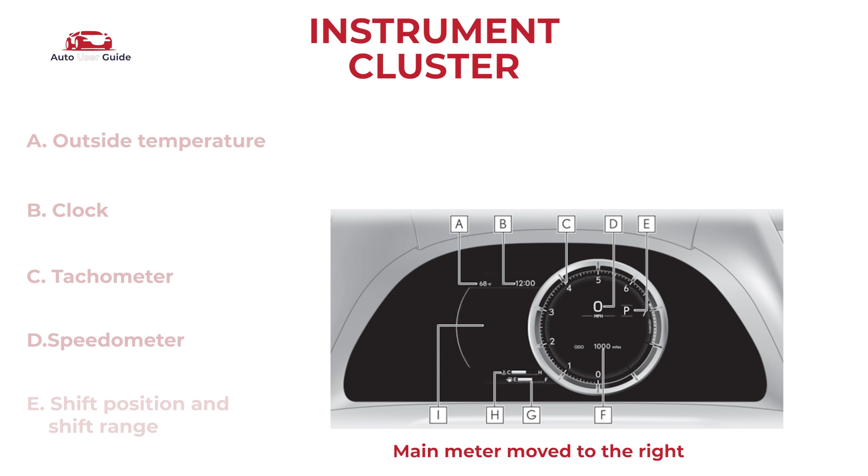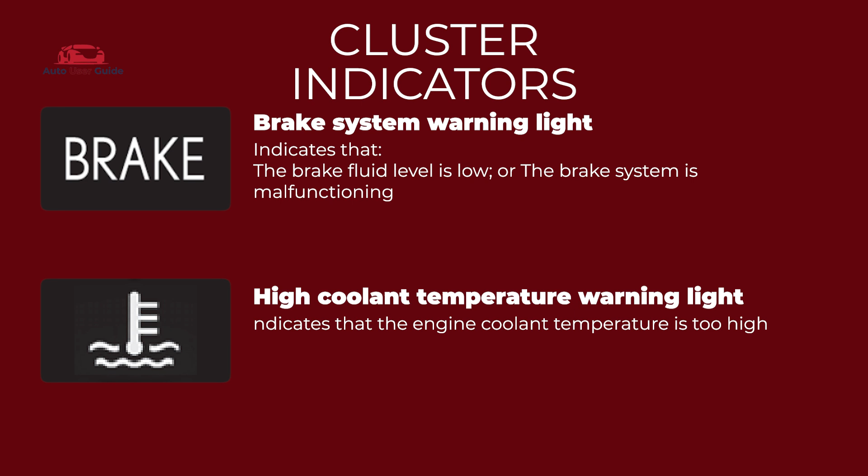Cluster indicators: brake system warning light, high coolant temperature warning light, charging system warning light, low engine oil pressure warning light, malfunction indicator lamp, and SRS warning light.

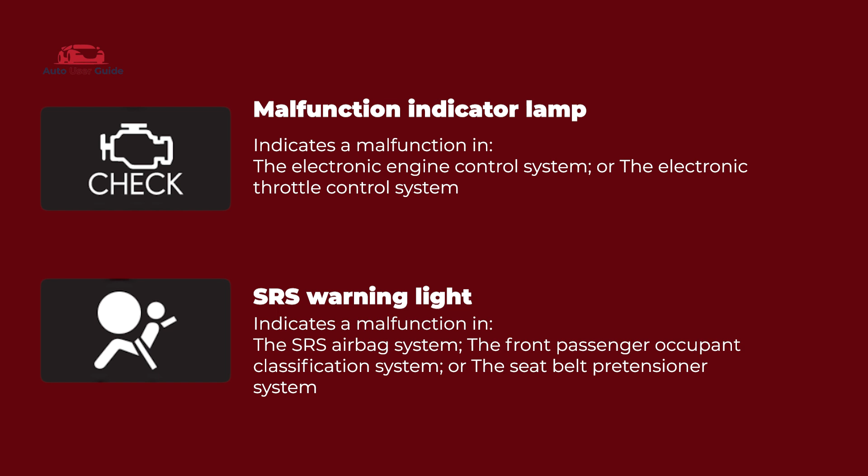ABS warning light, inappropriate pedal operation warning light, electric power steering system warning light, and low fuel level warning light.

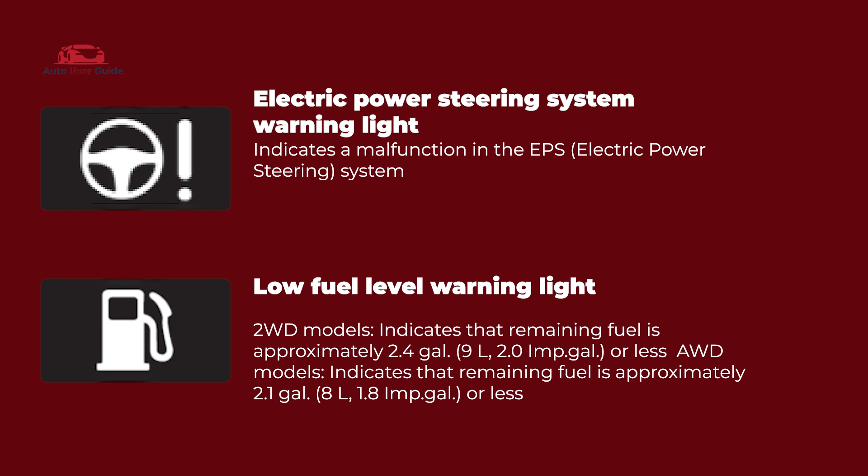Driver's and front passenger seatbelt reminder light, rear passenger seatbelt reminder lights, tire pressure warning light, and LTA indicator.

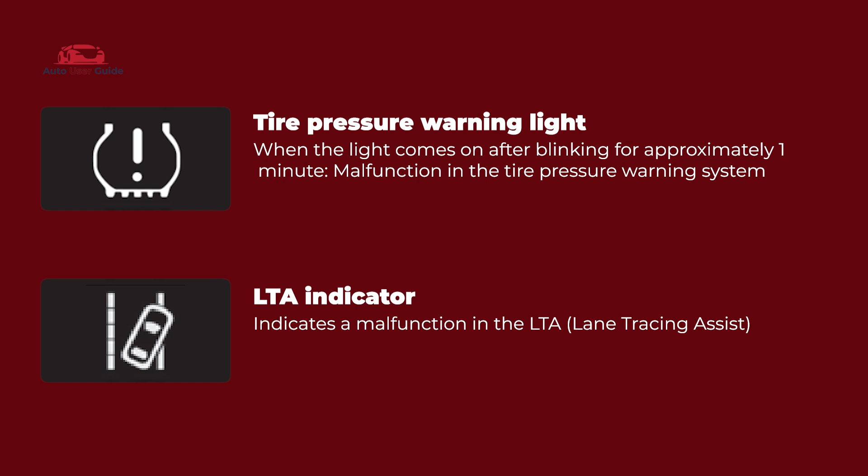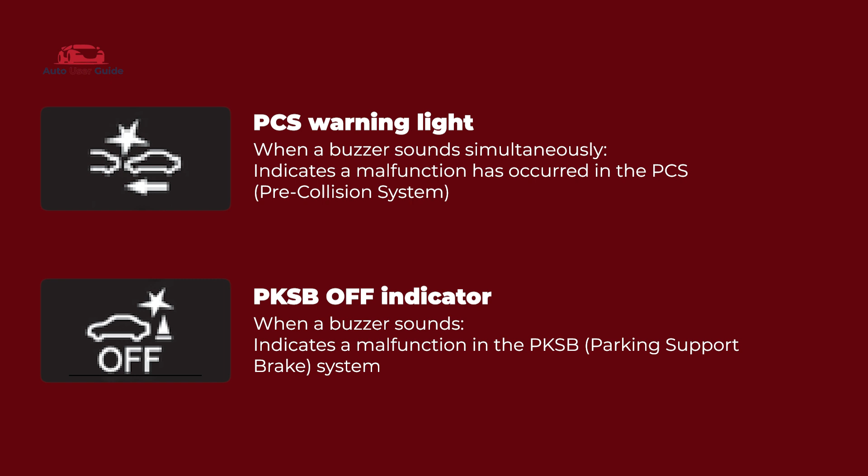RCTA off indicator, RCD off indicator, PCS warning light, PKSB off indicator, PCS off warning light, and slip indicator.

Parking brake indicator, brake hold operated indicator, master warning light, and turn signal indicator.

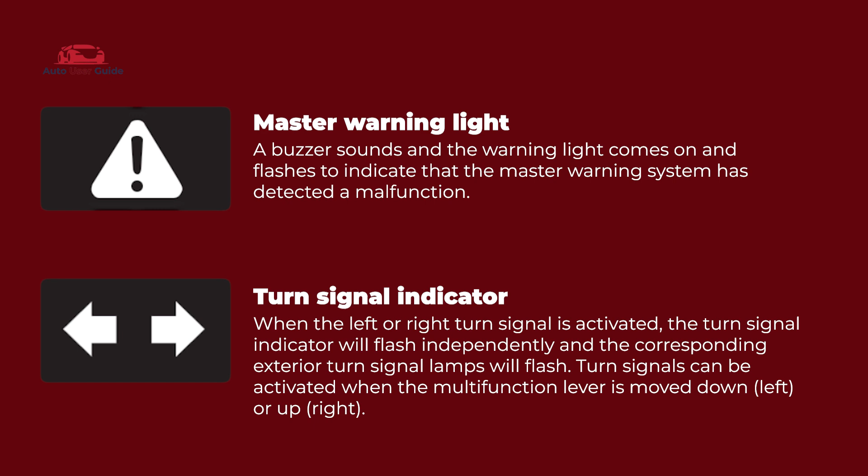Headlight indicator, tail light indicator, headlight high beam indicator, and automatic high beam indicator.

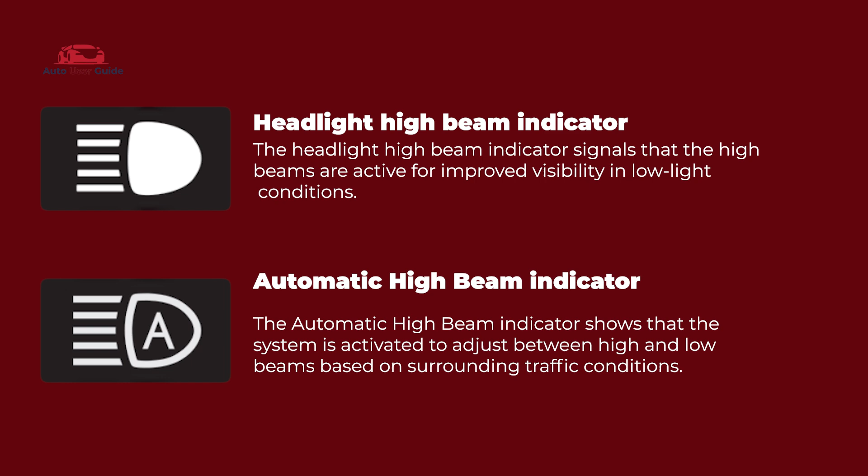PCS warning light, cruise control indicator, dynamic radar cruise control indicator, and cruise control set indicator.

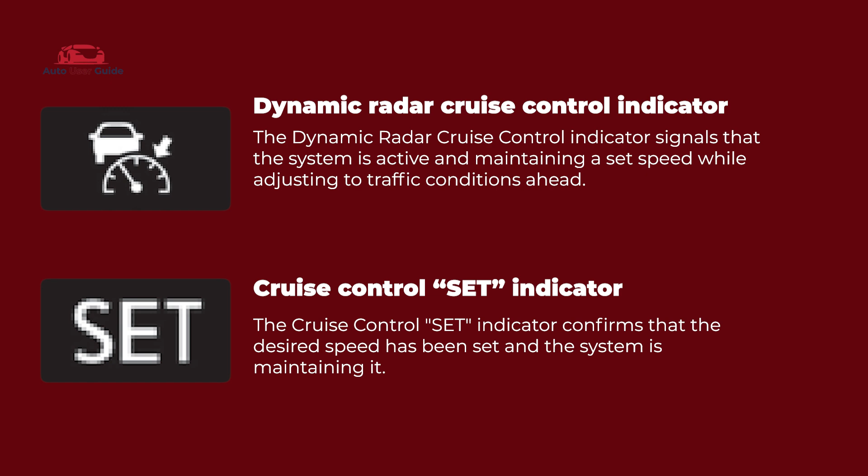LTA indicator, BSM outside rear view mirror indicators, BSM indicator, intuitive parking assist off indicator, and VSC off indicator.

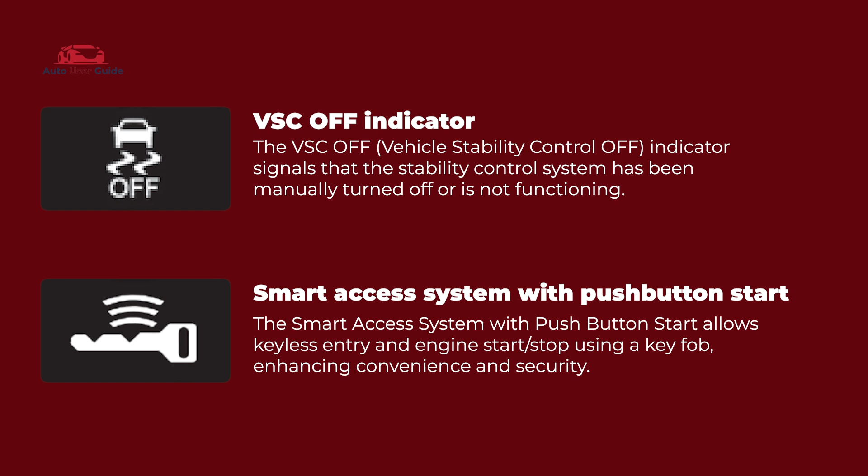Smart access system with push-button start, brake hold operated indicator, eco driving indicator light, low outside temperature indicator, and passenger airbag indicator lights.

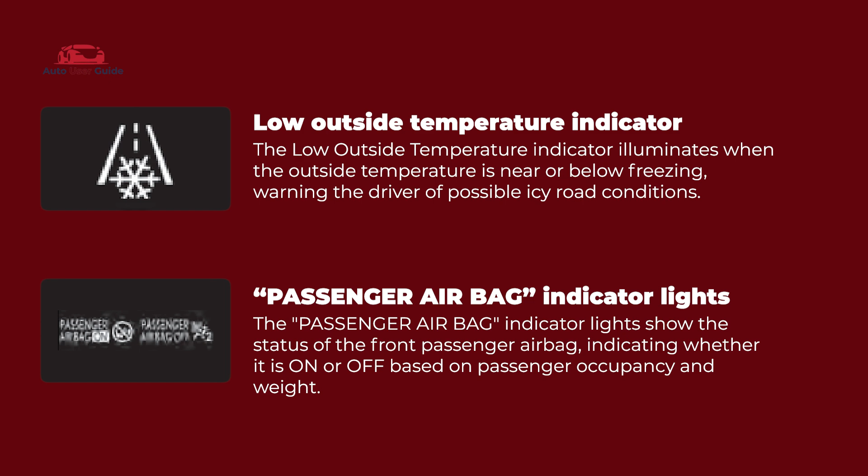Sport mode indicator, custom mode indicator, eco drive mode indicator, sport mode indicator, sport S mode indicator, and sport S plus mode indicator.

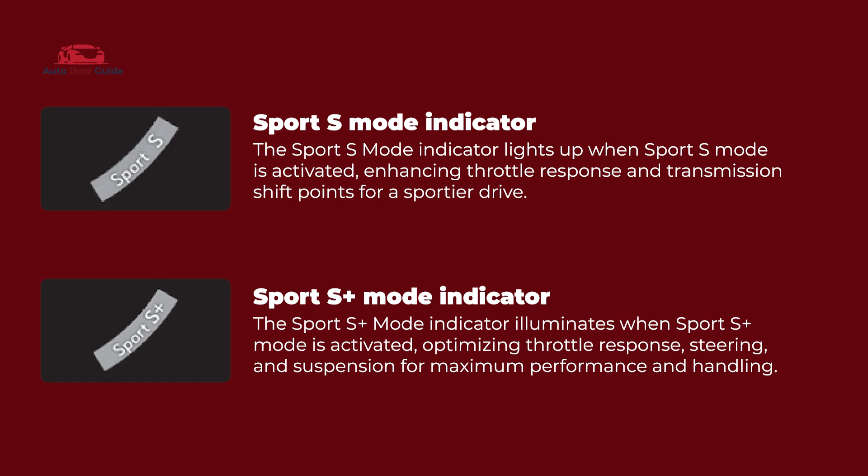Safety precautions: know your symbols and give them immediate attention.

Don't ignore a flashing symbol. Stop driving for red warning lights.

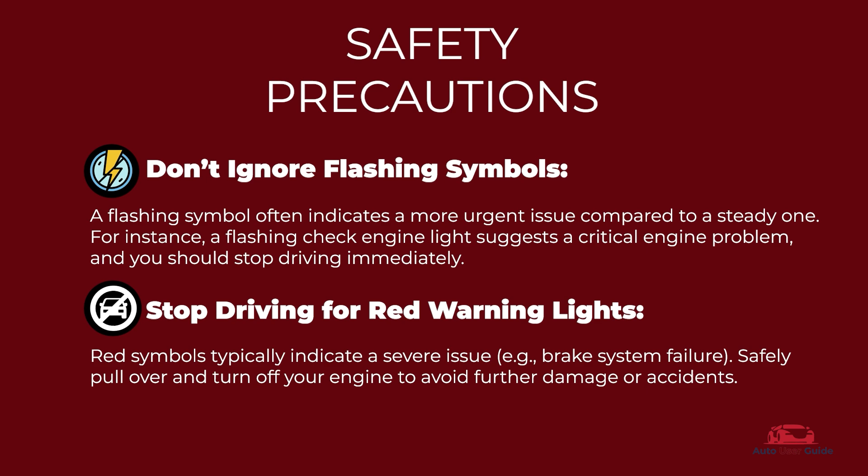Check the manual for unknown symbols. Perform regular maintenance.

Cluster awareness: don't distract yourself. For low visibility of symbols, use an OBD2 scanner for diagnostics.

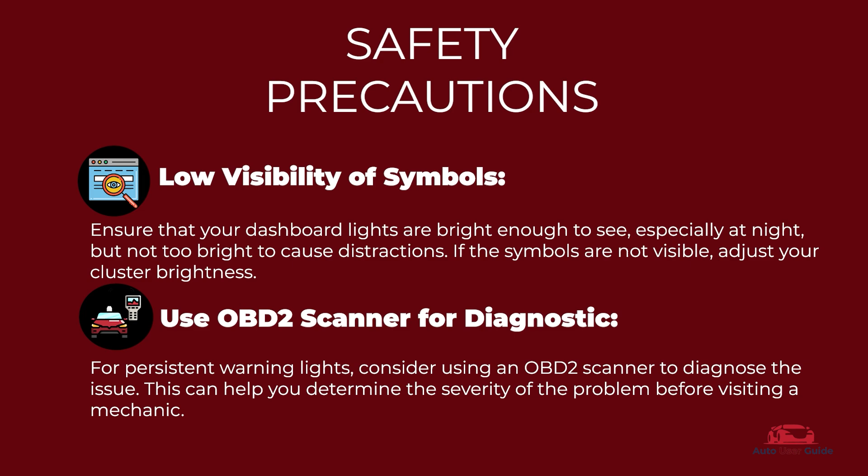General instrument cluster symbols. General dashboard warning symbols are designed to help you understand the most common indicators found in all vehicles. Whether you're driving a sedan, SUV, or truck, these symbols play a crucial role in keeping you informed about your vehicle's condition and safety.

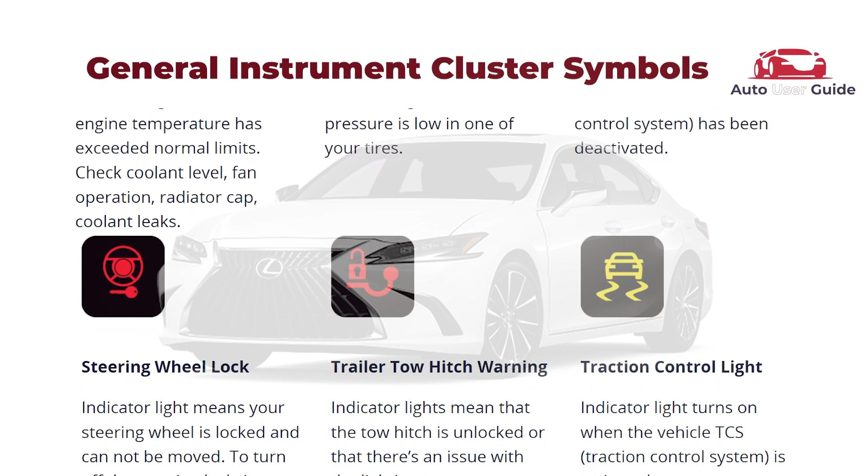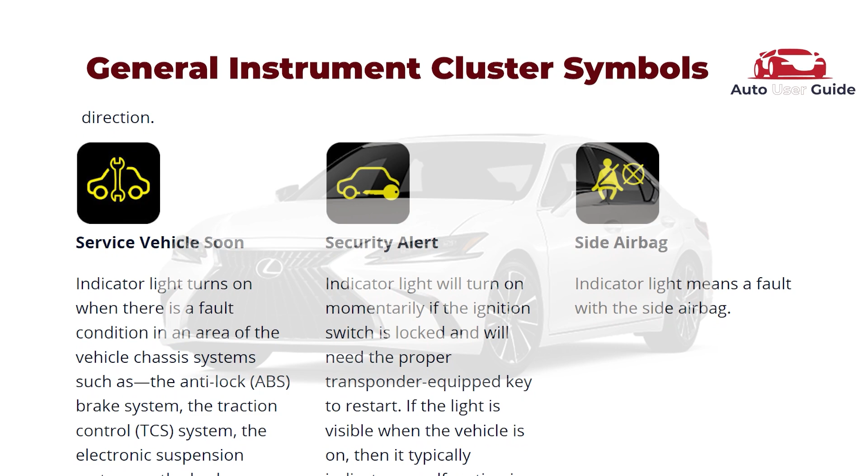Knowing what these symbols mean and how to respond can help prevent breakdowns, maintain your car's performance, and ensure your safety on the road. From the check engine light to the oil pressure and battery indicators, each symbol serves as an alert to help you take action before a small issue becomes a bigger problem.

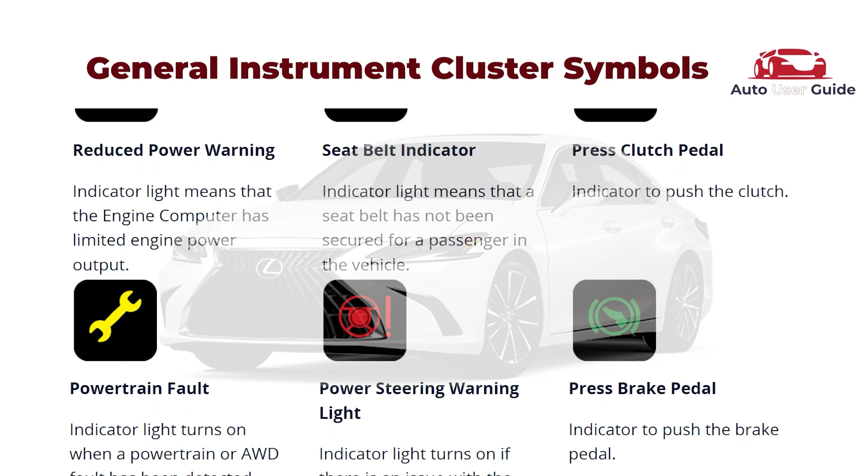Understanding these warnings can give you peace of mind, keeping you aware of potential issues and allowing you to address them promptly. Now let's dive into the most common symbols you may encounter and what they mean for your vehicle.

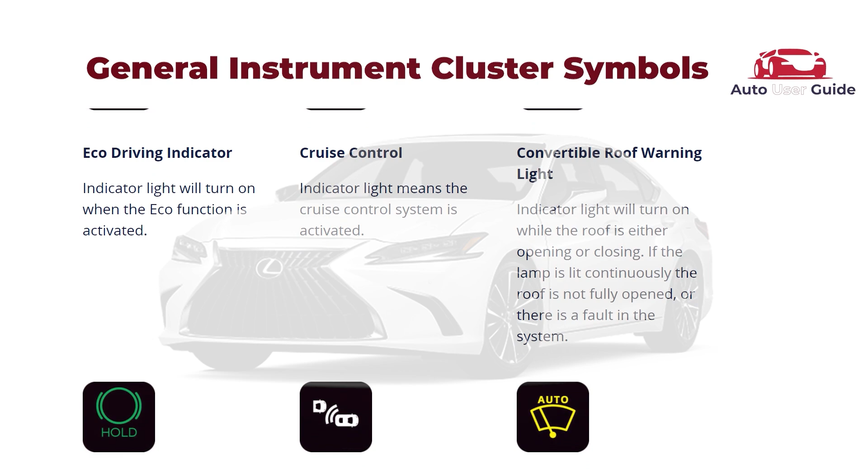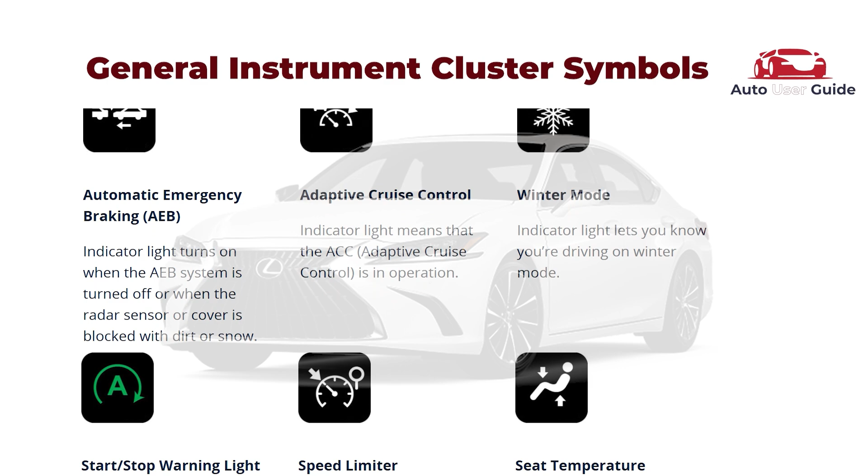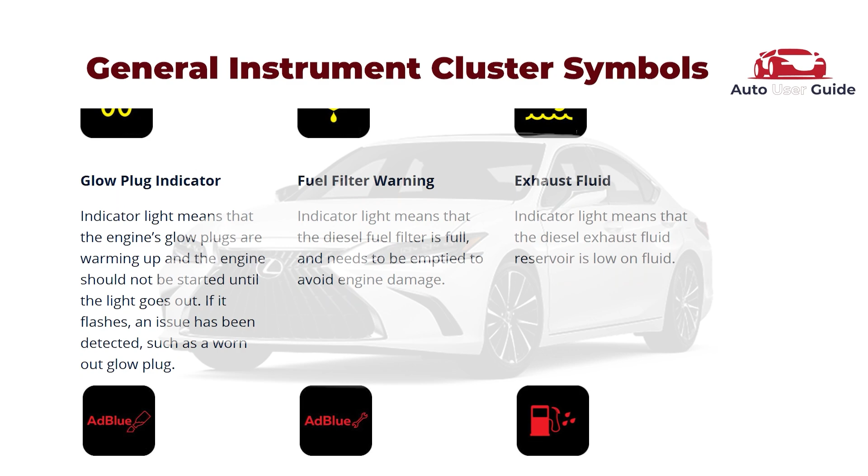Now that we've covered some of the essential symbols, keep in mind that while many dashboard indicators are universal, some may differ depending on the make and model of your vehicle. It's always a good idea to consult your car's manual for specific meanings and recommendations.